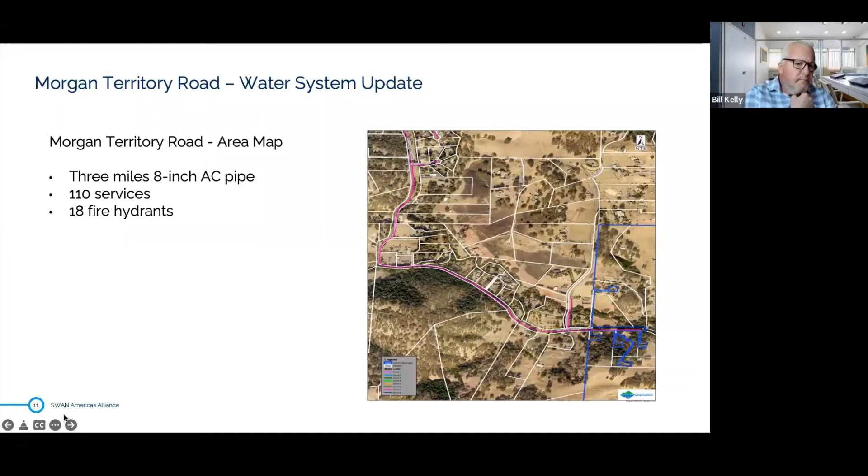The water area is actually pretty unique in itself because they've got different services they provide. Besides the 110 connections, they also have 10, I think it's 12 now, service agreements for trucking water, so they have a fill station where they can fill water up. They also have some modified pressure zones where the houses are considerably higher than where the water main is, so they've got additional pump systems on them. And then there's also wells in the area because it's an equestrian area where people have large horse farms, and these wells have a tendency to go dry over a period of time.

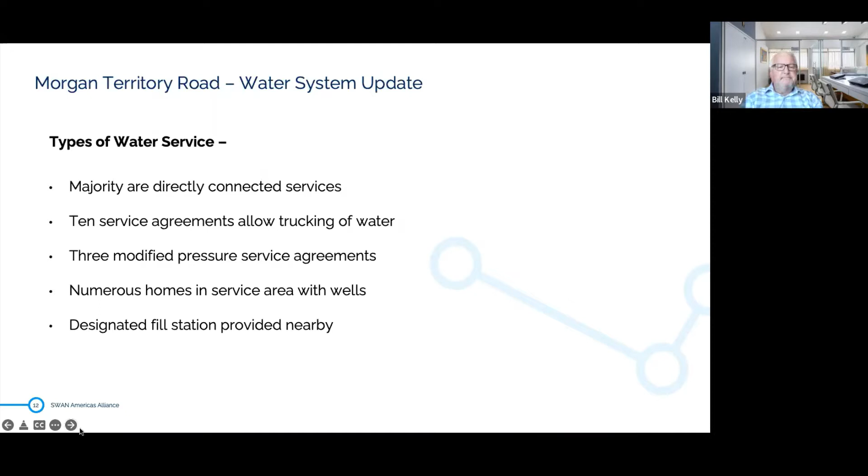So what happened during the notice in 2016 is that they were having repeated leaks on the system out there, primarily due to the drought conditions. In 2019, this escalated a lot further, meaning they were seeing more problems in the area, and they were having ongoing pressure issues, and they were concerned about that 8-inch AC line breaking out there. They had experienced some breaks out there, but they were able to mitigate the problems.

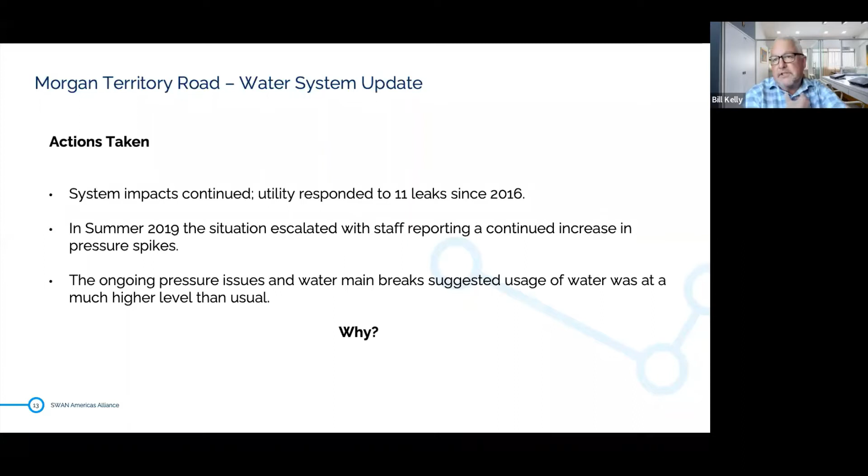So the Contra Costa Water District, as part of the communication side of this, reached out to the community members and said, don't do this, don't fill up on the fire hydrants, it's bad for the water system. So Contra Costa went out and installed a fill station.

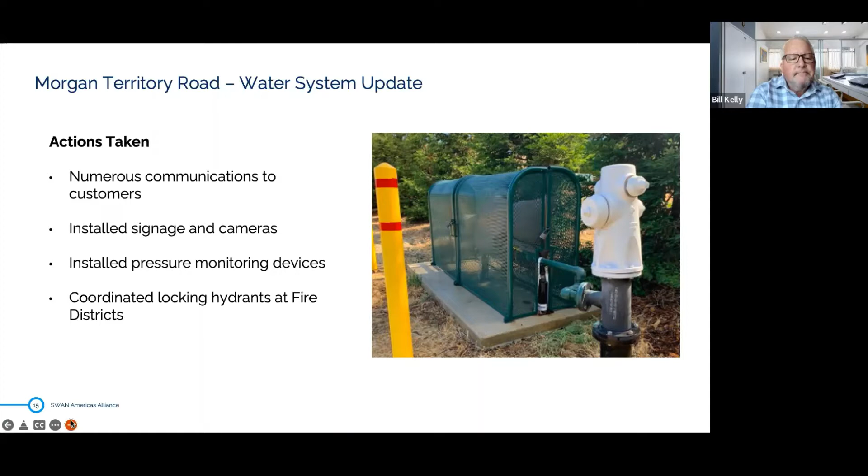Contra Costa approached us at the ACE conference, and then we actually started working with them to start monitoring the system.

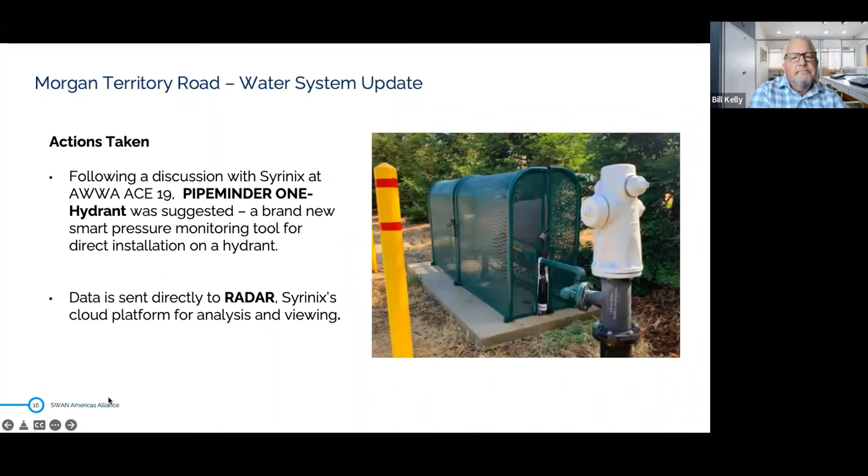We used one of our units, what we call our PipeMinder-ONE Hydrant, and it's a hydrant mount unit that's got a 4G system on it. You basically screw it onto the fire hydrant, charge the fire hydrant, and we can immediately start monitoring the system.

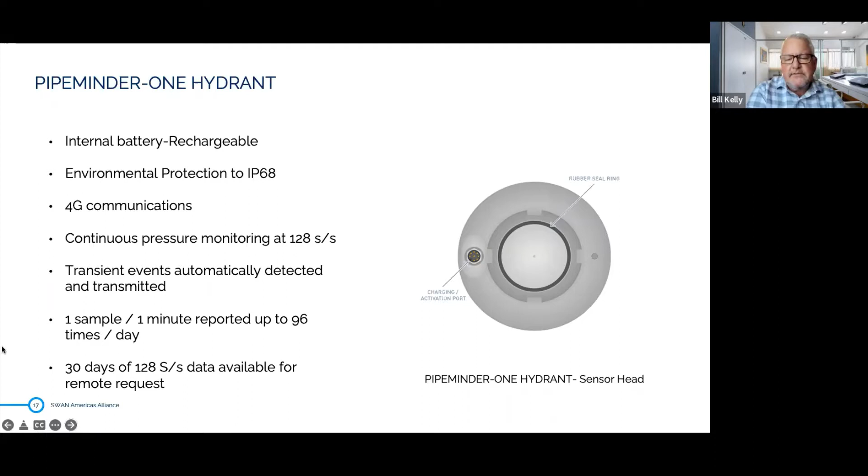So what that does is the information from the 4G goes up to our cloud-based platform called Radar, communicates the information to Radar, and the client is able to access Radar through any desktop, laptop, or phone that they can use.

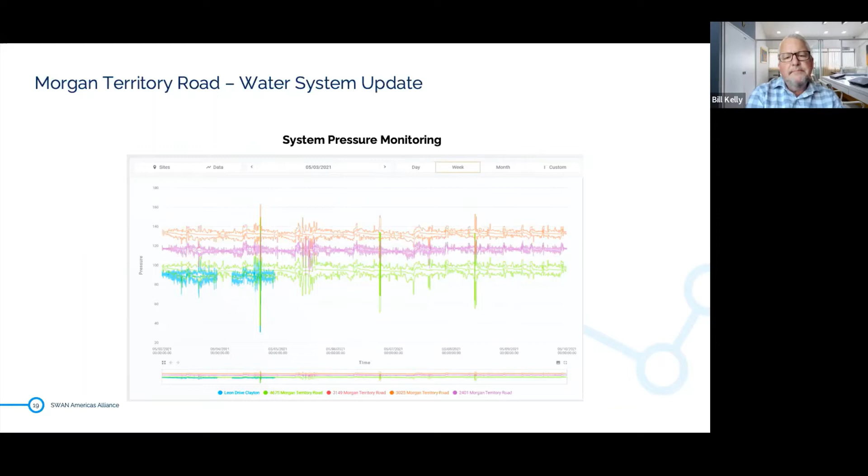So this is what it looks like when someone is stealing water. This is the exact signature. When the hydrant's open, someone opens it up, there's roughly a 60 PSI pressure spike on the system. You can see the pressure decrease, the fill time on it, and then someone slams the hydrant closed, and you get the high pressure spike, and then it goes back to normal pressure.

This is something you would see when the fire department is practicing flushing or other work. What we did is research with Contra Costa, and we realized this fill time of about 10 minutes would fill a tank of about 700 gallons. So this exactly coincides with that fill on that tank.

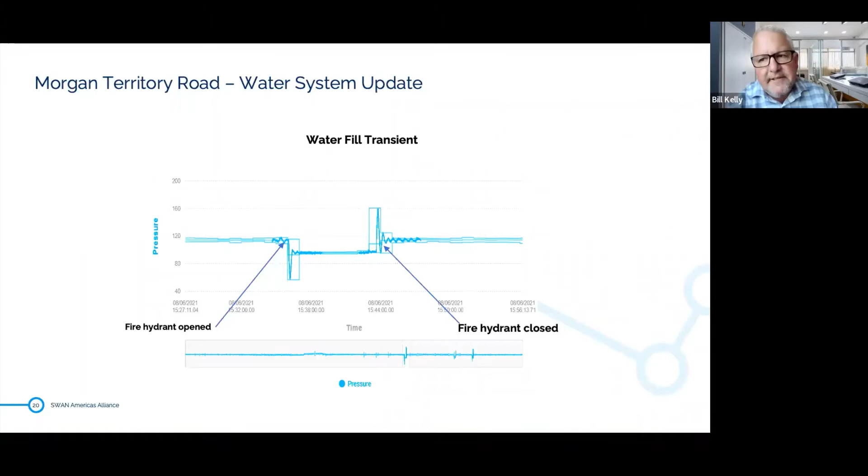Next slide, please. One of the things we looked at is the data received from Contra Costa that was sent up to Radar, and we triangulate the event that's going on, trying to find out where this event is occurring on Morgan Territory Road. We're taking data from multiple points to pinpoint where the problem is occurring.

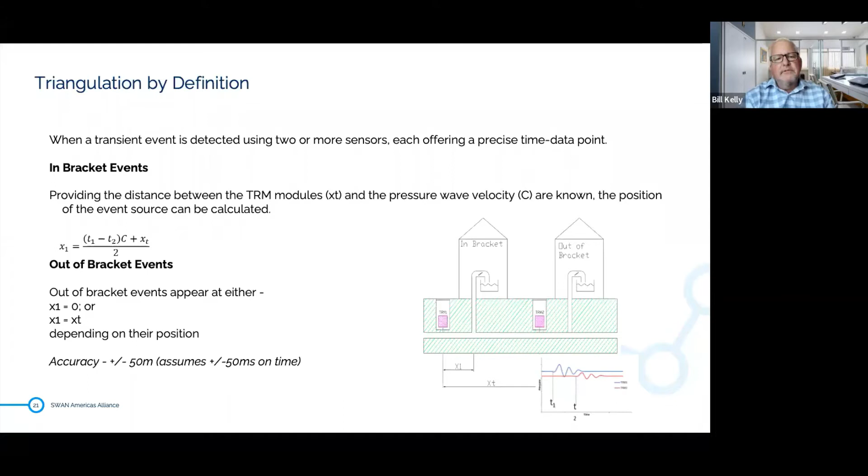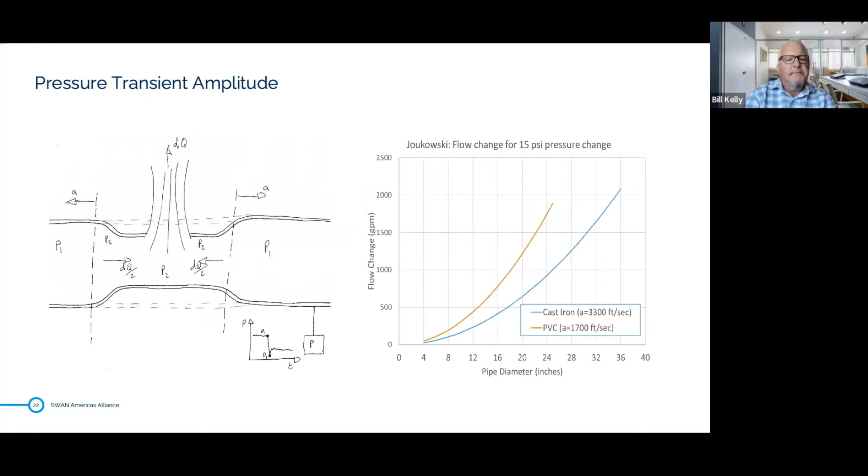Next slide, please. The way pressure transients propagate through the network is they move in a wave, sort of like amplitude, or if you're outside yelling, you can have a pressure transient that moves through the system. And if it hits a dissimilar joint, it's going to bounce back, or if it hits a junction, the amplitude is going to diffuse inside of it.

That's why when calculating the triangulation, we take in the customer's GIS information so we can see the pipe material and the different joints associated with it. Next slide, please.

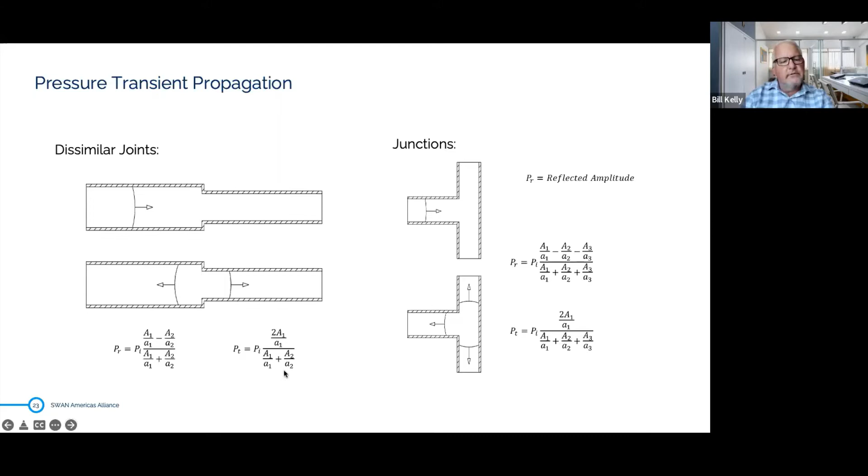We've done numerous studies on this, one with one of our clients in the UK. What we were able to do is figure out the attenuations, where we can measure the different time it takes from the break, or simulated break in the center, to the other devices. By going backwards, we can do that in reverse and picture where the water is being taken from the system itself.

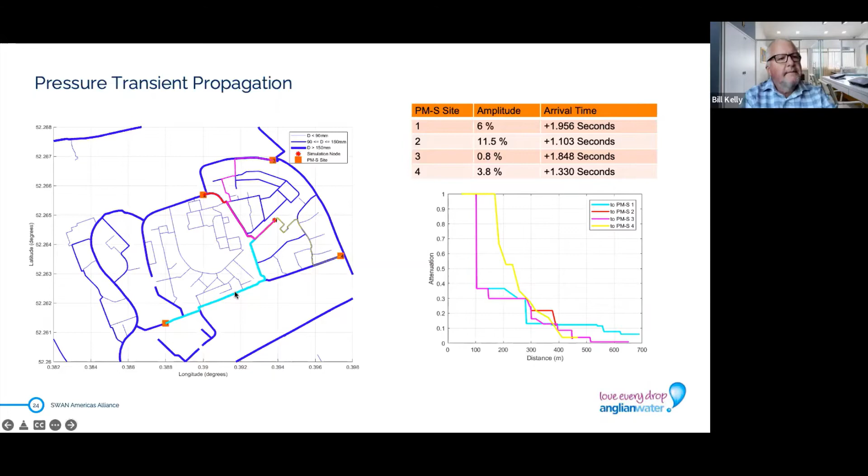Ironically, these fills for the tanks generally happen sporadically Tuesday, Wednesday, Thursday, not on the weekends, but on Monday morning from 9 to 10, and then on Friday from really 2:30 to about 5 o'clock, we would see someone going to fill up the tanks. Next slide.

Next slide. There it is. So the utility understands what's going on. They know when they're going to fill up, and they've put out game cameras. They've put guys in trucks out there to identify what it is.

They've locked the fire hydrants. The challenge is locking fire hydrants in a very high fire area. The customers in the area said, can't lock the fire hydrants because we've got all our own hoses, we're going to fight a wildland fire if it happens here. So they had to remove those off.

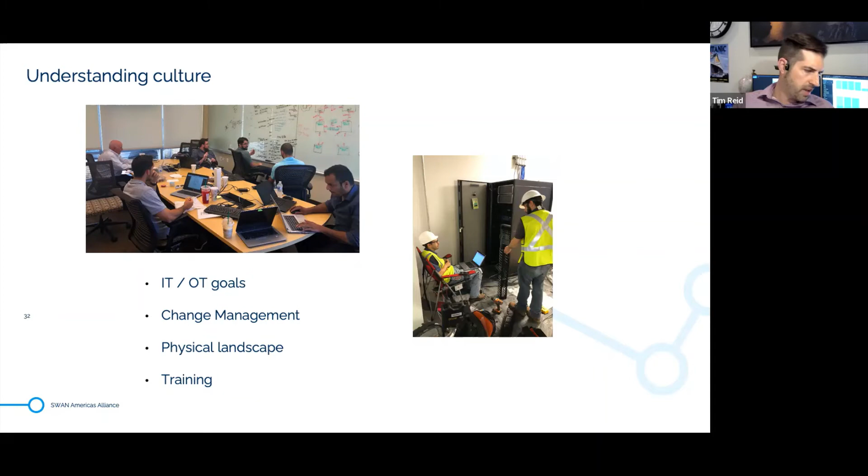But another component, when I talked about control in the beginning, was making sure we implemented a solution that allowed IT to have some oversight in the way the solution is laid out across the system - it being consistent throughout the whole network - but then enabling those users on the ICS team to be able to, let's say it's a port configuration change, get in and make modifications on their own without IT intervention, because that could be another block whenever having to put in a ticket and wait on it for something to be done.

So making sure you build that into your segmentation plan and your conversations. I'm starting to run low on time, but it's hard to talk about all this in the short period of time. I'd be glad to answer any questions during the Q&A, or at another time, about exactly how we made this work. But at the end of the day, it's about listening and communications to be successful with this.

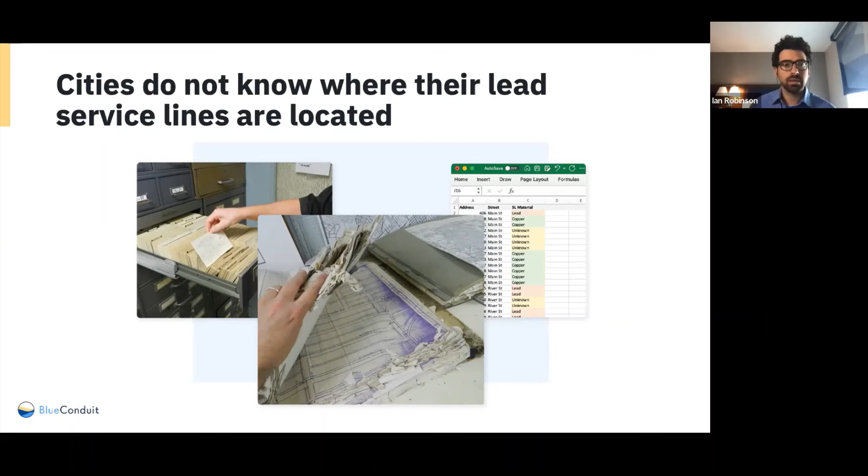Field verification is the only certain way to know 100% what the service line material is at a specific address, but there are not resources to go and dig up every address. So our team at BlueConduit worked with Mark to think about, if we have funding for a couple hundred investigations scattered across the city, what would be the most advantageous locations to inspect in order to verify service line material? A key thing for us was treating the historic records with the appropriate amount of skepticism - knowing they're going to be helpful for any statistical model, but they're not going to tell you what the service line material actually is.

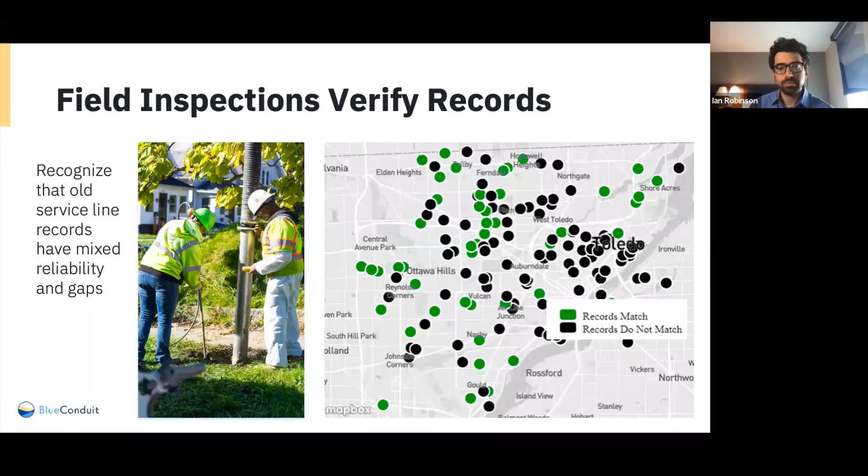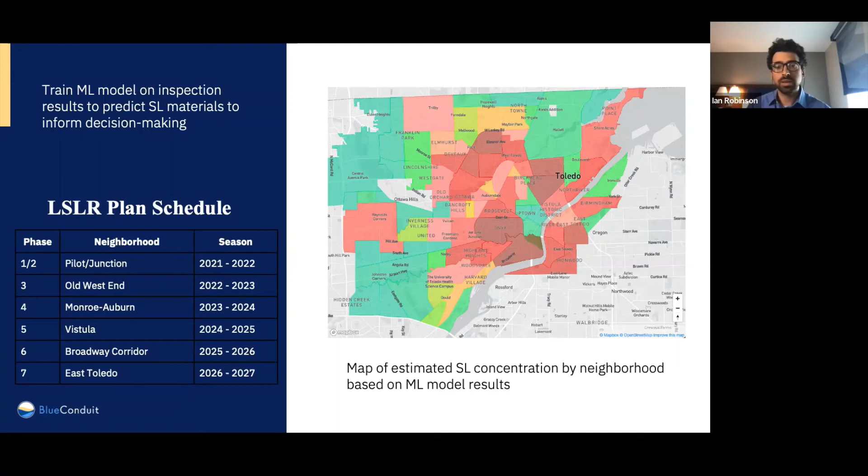Next slide. Mark will talk about how this information is being shared with the public, and how they're not just sharing information with the public, but also getting information from the public too, to continue updating the map.

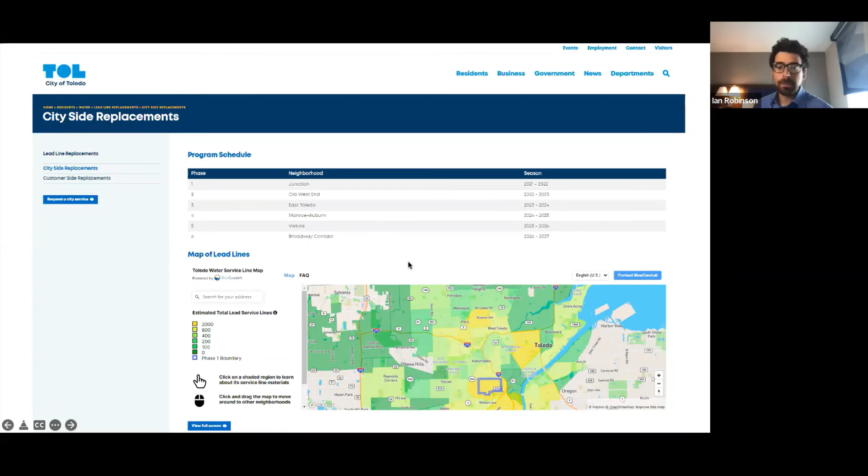Well, as a city, we put on our website an informational page that will help all of our customers and residents with the lead service program. It gives them FAQs, we provide information, we provide mapping, and we also provide the program schedule. This helps with our community outreach, so anyone with a question about our program can go onto our website and receive all the information they need.

For example, if they want to see if their home has a probability of having lead, they can go onto this map, type in their address, and it will say there's a probability that you do have lead, or a chance that you do not, depending on when your house was built. It's really helped improve our program and assists customers in identifying the type of material they have in their pipe. With this map, or our website, we've been able to really amp up our program as far as identifying where we possibly have lead.

When we look at our records that were really reliable, we showed that we probably had about 3,000 lead service lines in the city. But through our investigation, we're finding out we have more. So with this community engagement website, and also doing community engagement where we've been going out to community centers, speaking with community groups, this has been a lot of help working with BlueConduit.